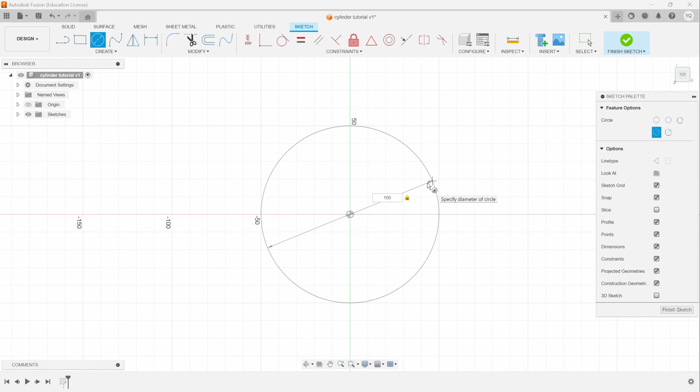What I'm going to first do is create a sketch. A cylinder, you start off with a circle. We'll make this 10 centimeters - that's kind of big. We'll just make it 1 centimeter. All right, so we have this 1 centimeter. We'll make it bigger - we have this 2.5 centimeter circle. We're going to hit finish sketch.

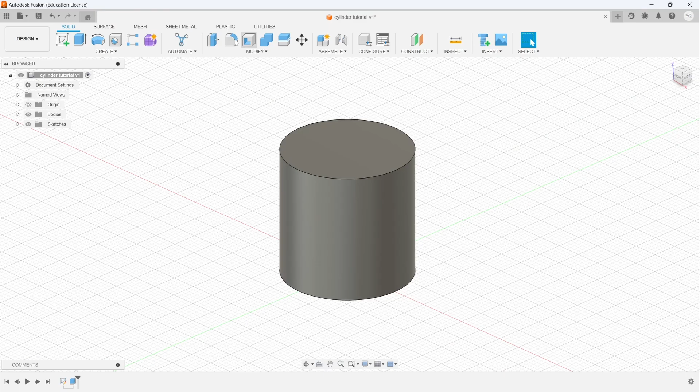Then we're going to go home, extrude. We'll also make this 25 millimeters as well. So now we have the cylinder. There's a whole bunch of things you can do. You can fillet it 2 millimeters, kind of this dome thing.

All right, so after you have your object, to go from the workspace from design into manufacture. Here we are going to set up our printer.

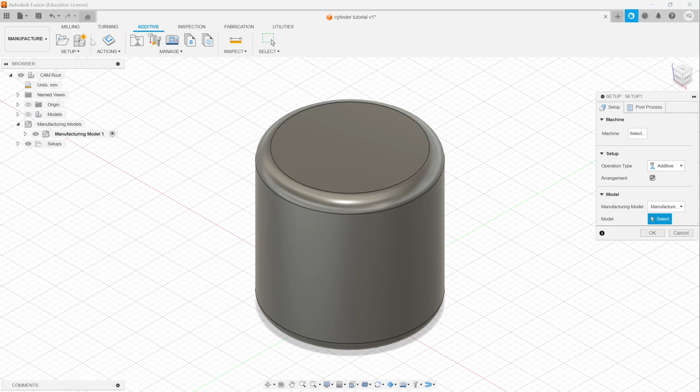So you go to setup by clicking this little folder icon. And actually, before you hit OK, you want to select the machine first. For me, I use the BIQU B1, but you can probably find whatever machine you want using the Fusion library. Generally, Creality is pretty popular - I know the Ender 3, a lot of people have this.

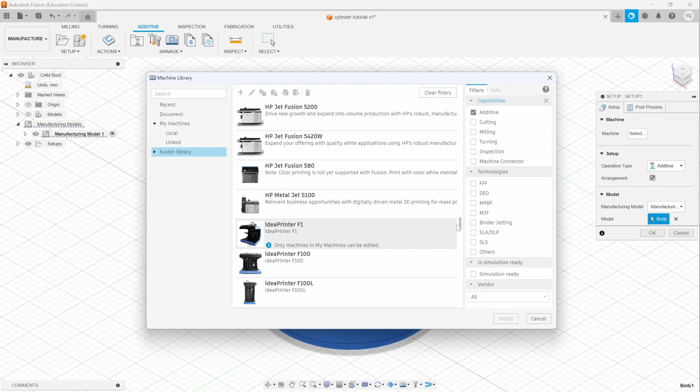So if it's not in here, you can also use custom machines. Let's see, can you create a custom machine? I'm not too sure. I just found mine, so I was pretty fortunate. If you can't find it, then you'll have to go to a different tutorial.

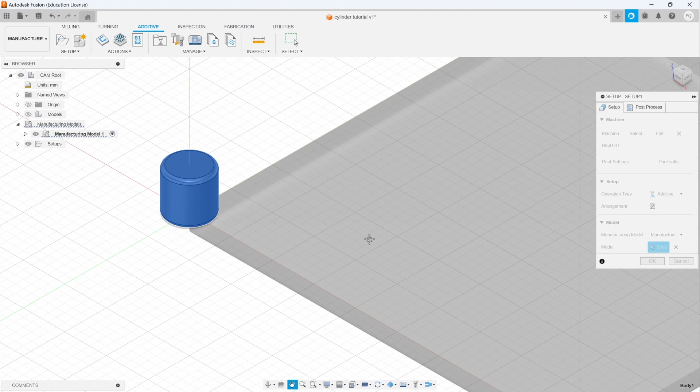BIQU B1, select, and then it will show the print bed. So here's the entire print bed. You want to hit print settings. Here you can select what filament you're using. For me, I am using the PLA, and this one is a Bowden tube, so I would just select that. Operation additive, and we are good.

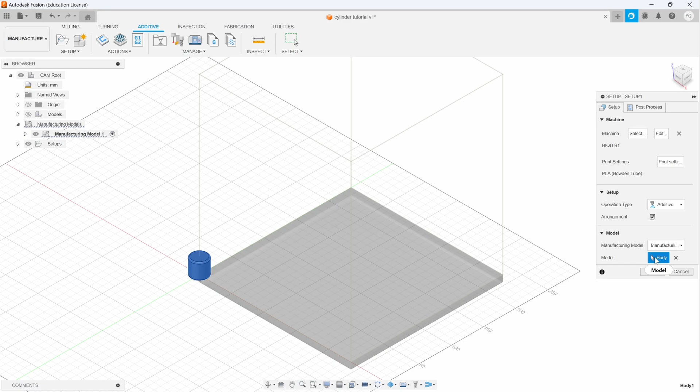If you haven't already, select the model. You would click the model button and then select it. Okay, so now that everything's okayed, we just need to arrange it.

Well, you can move the components manually, which is generally what I like to do. Place parts on the platform. So use this, click, and okay. Once it's placed on the platform, you select a spot.

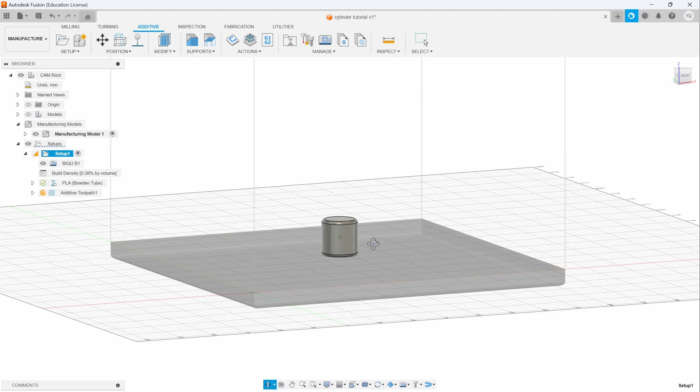If you want to select the temperature for your printer and your filament, you would double click. So in my case, because I selected PLA, I would double click this. Print settings editor would pop up. Under general, here you can select print bed temperature - we'll have it say 65.

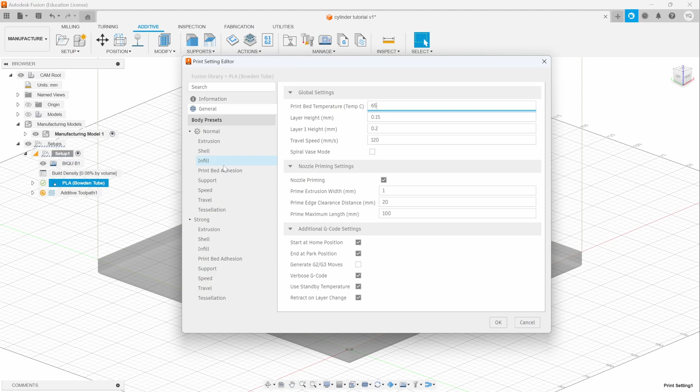And then here you can also select the extrusion temperature. So here, extruder 1, 215 degrees - that looks good. All right, and then you would just hit OK. Or these are the temperature settings that you would have for your printer and your filament.

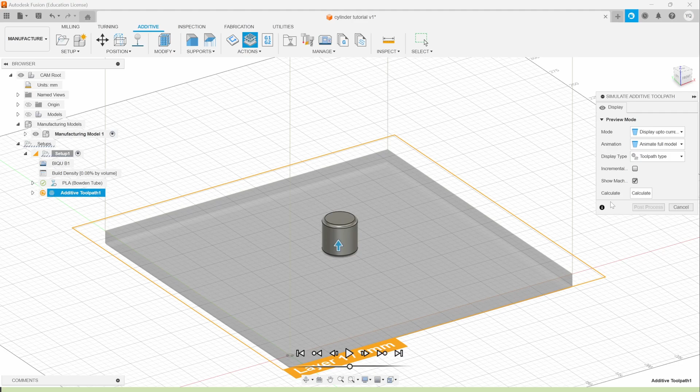Afterwards, you would double click the additive toolpath. So now it just generates everything. I normally leave all this default, hit calculate. It does its thing. So you can use the bottom to scroll through what your print is going to look like, and it'll do its thing.

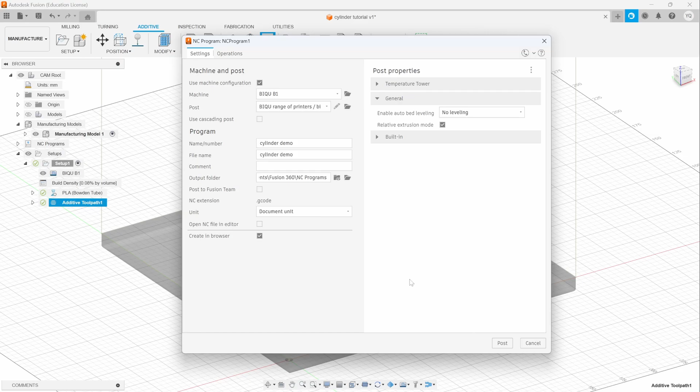So afterwards, you want to hit post process, and this is where you would save the final G-code file. So here I would call it cylinder demo, and then the machine, the printer, all that. Yeah, I would leave everything default. Post, overwrite - yeah, so I created a demo file before. Overwrite it, no problem. You can view it, and here is my cylinder demo G-code.

We can open it with Notepad. Here is everything - BIQU B1. Here's the 215 temperature, 65 for the bed temperature. So that's it, and the rest is all default.

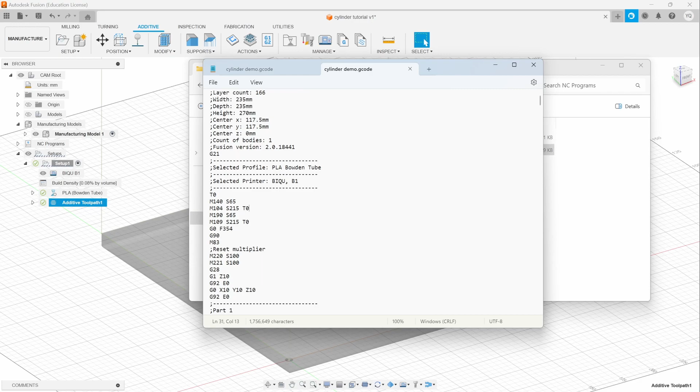And then so you would then copy the G-code over to your printer, and you would have it print. That's all you need to go from start to finish. All right, thanks for watching.